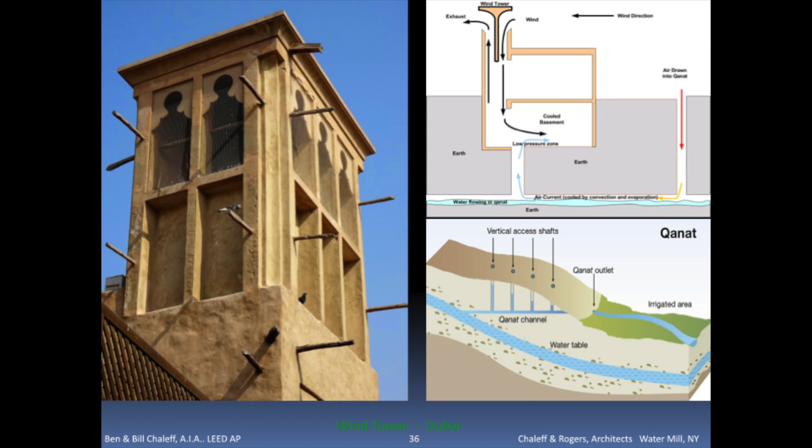This is a brilliant use of knowing what your resources are and what you can do with them. You're driven to this because otherwise the climate would be pretty unbearable. It's the first geothermal system, right? And that's what it looks like as part of a whole building.

Because at about the same time across the Mediterranean, there's the stone building, the same arrangement of columns and lintels and so forth. The Egyptians were also building these buildings out of stone. I think the precursor lies not in a wooden, quote, primitive prototype, but from what I understand about the relationship of Greece and Rome to Egypt, it lies in the work done by the Egyptians in creating their buildings, originally of stone, hardly any wood there. So I think that's what happened.

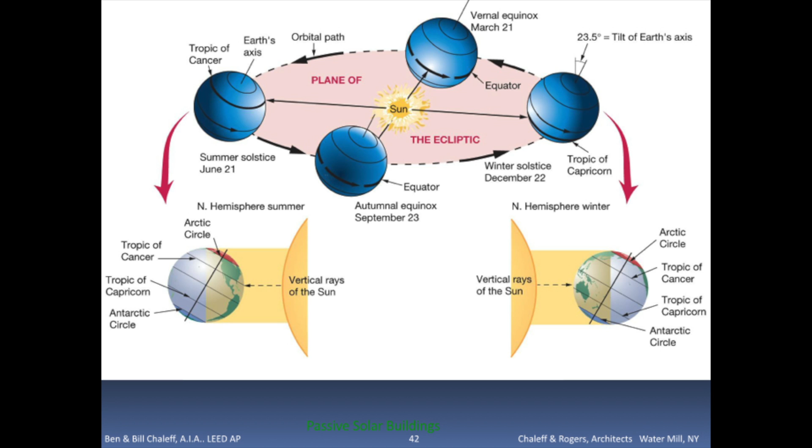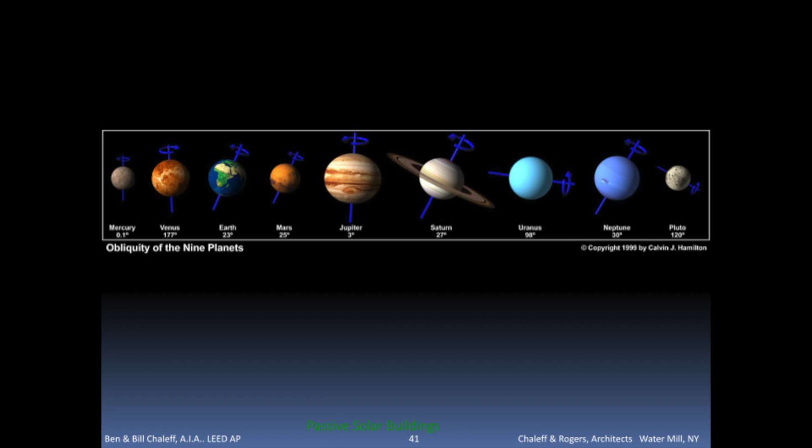Okay, so these are the pragmatic elements of the formula that shape our buildings, and that we should heed when looking for input about what our building will be like. If we don't pay attention to these basic issues, then we're not going to get an optimum building in terms of low energy use and in terms of being pleasant and comfortable to live in.

It's the whole concept that Socrates outlined: the southern side would always face south with a high wall to allow for more solar exposure, and the north side would slope. The roof would slope all the way down, so you'd have one story's worth of wall exposed to the north winds, and a lot more roof exposed to the north winds. This part was not new, but you'd have a large stone hearth at the center of the house. It would provide heat and cooking, usually on multiple floors, and once that mass got hot, it kept the whole house warm.

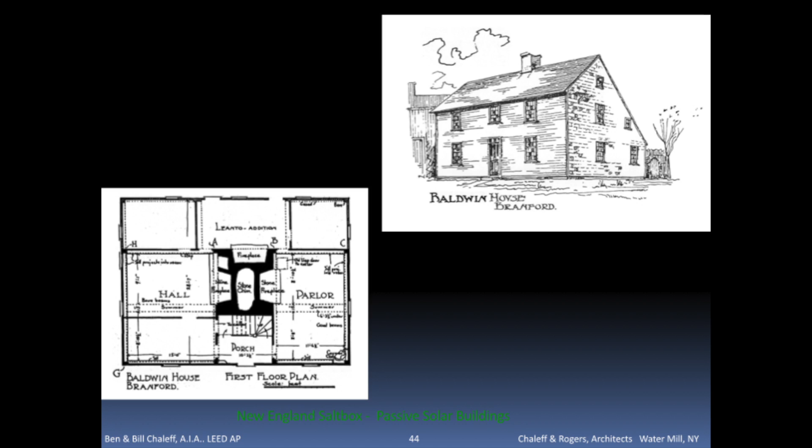So here we have a building form that responds 100% to climate, to resources, materials, and we get this optimum efficient building.

Thomas Jefferson, 3rd President of the United States, says, 'I'm tired of being a second-class act compared to France and England. What are we going to do about it? We're going to be the new Greece.' So he starts the Greek revival period and throws out the baby with the bathwater. These buildings face every which way, and Sag Harbor is a great collection of Greek revival buildings and buildings from other periods as well, but Greek revival.

The orientation is however the street is; it always faces the street. Whereas if you go to East Hampton, on the Mulford Farm and the Home Sweet Home there, those salt boxes, you can see the irregular roof line, the asymmetrical roof line. You're looking at the gable end of the building facing the main street because the building itself has its two-story wall facing south. So all of that went away.

Chimneys went on the ends of the building instead of in the center. Masonry is a horrendous insulator. In fact, it's the opposite—it's a conductor. So you don't want that on an outside wall, but nonetheless, this is what happens.

Now, if you go down Baltimore or further south, and if you take this portico off here, you will have a rectangular building with chimneys on the end. That's the prototype for buildings in that climate and further south when you're trying to cool, and the buildings are usually one room deep for maximum ventilation. But here, no, it's all about culture. It's all about what is up here, and it takes precedence over all the other pragmatic issues.

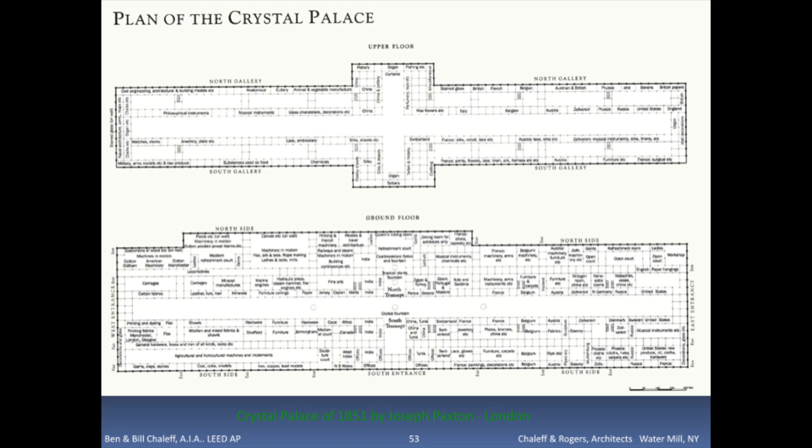This is the floor plan, it's 1,851 feet long - we understand why, right? And it's a simple section, because the design was the first mass-produced building. All of these cast iron elements are repetitive elements, so there are molds and jigs that can be used to create the whole building.

In fact, he even foresaw and understood the necessity to jig the actual erection and assembly of the building. He designed simple machines that fit exactly onto the building. The design of the building and its process of building it were designed at the same time.

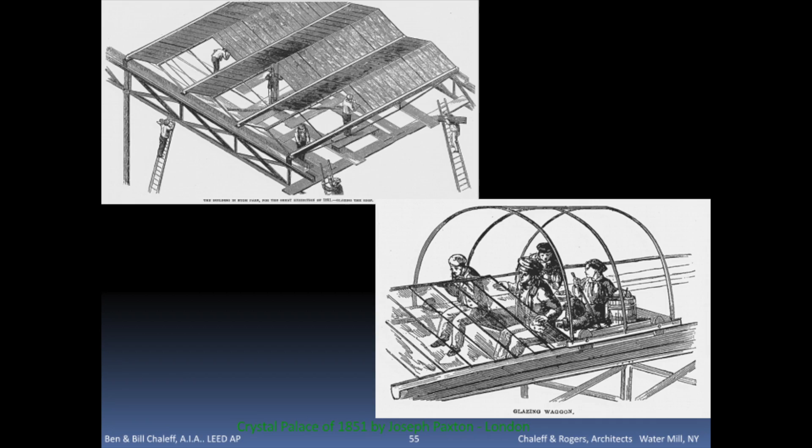So the acres of glass that were used, all in repetitive, same-size pieces, were stacked onto rolling carts, and they would run along in the gutter valleys. The workman would lay a piece down, seal it in, move on, do the next one. He designed and built the building in 6 months, and made the deadline on time and budget.

And the building was an enormous success. It was up for many years, and at the end of the fair, it got disassembled and reassembled on another location, and stood for decades. I think at one point there was a fire that destroyed the building ultimately.

But in terms of conceiving a building where the industrial world was now moving to the idea of interchangeable, exactly the same parts - that's what we have from Eli Whitney and the assembly of guns for the Civil War. That idea was born there and carried now into the world of building design. So we have the industrial building age.

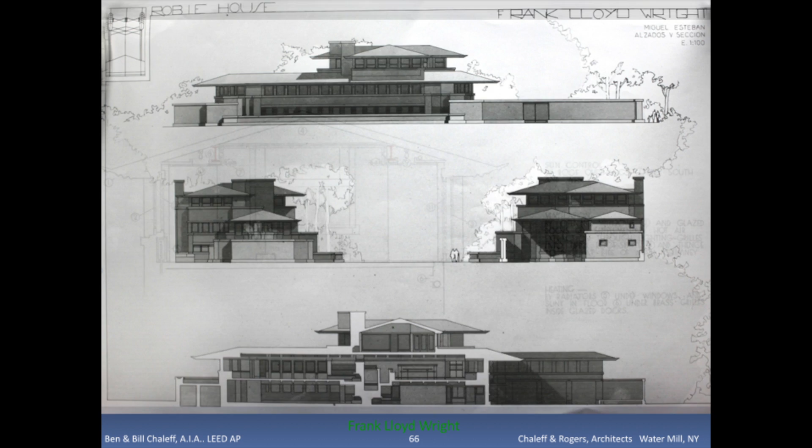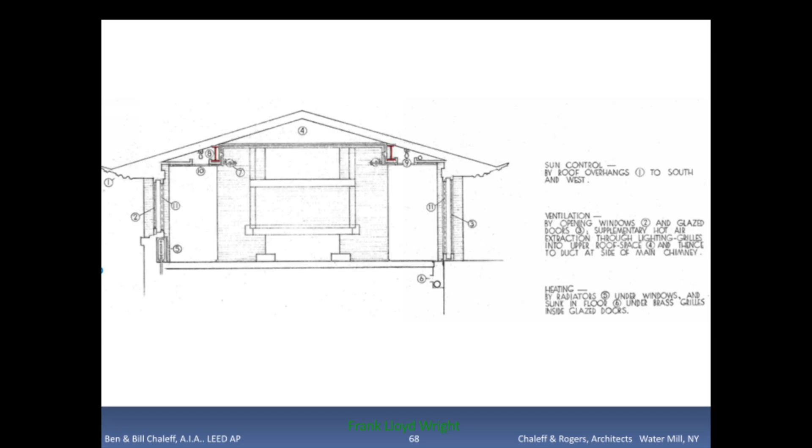If you go to the next slide, see that—you come through here, you're coming right in here. So you enter into this courtyard, facing south. As one—I forget the actual plan, the plan's on the next page, I think it shows that. No, I guess it's not. But the point is that through the day, as the sun rises in the morning and gets to be noon and passes into the afternoon, the sun's rays will start on the left side, assuming it's facing south. So basically the house itself, and the occupants, are tracing the path of the sun throughout the day.

He called that the solar hemicycle, in that you are always facing due south wherever you might be in the house, assuming you have the opportunity to face south throughout the day in the entire plan. The building is one room deep. The whole lower floor is one giant curved living, dining, kitchen, and then there's a second floor balcony with bedrooms to the north, but they enjoy the same view as the two-story glass wall.

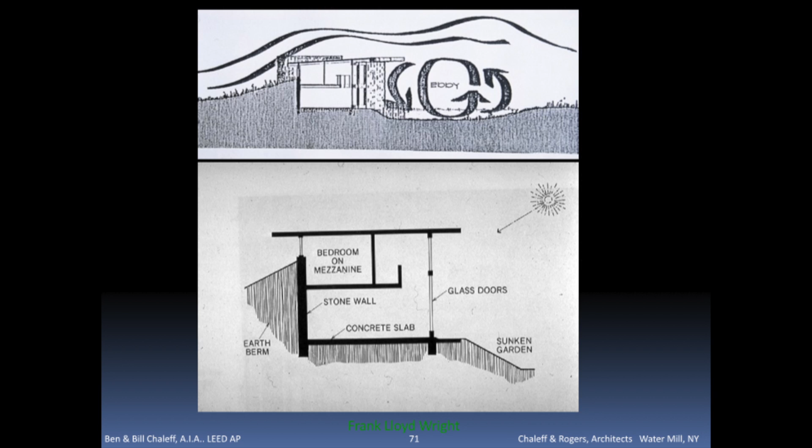That's the interior shot. Now if you go back to the Robie House and walk a few blocks from it, you will find the maximum expression of large sheets of commercially available glass at a relatively good, fair price, and big pieces of steel. That's different than cast iron in its ability to span and take bending stresses. Cast iron is brittle and doesn't bend very well at all, so you have to watch out when you use it as a beam. As a column, you can do okay.

This is Crown Hall on the Illinois Institute of Technology campus by Mies van der Rohe, and there's another view of it from the outside. The building essentially has these big bents, giant trusses at these intervals—I don't know how long that is, maybe 80 feet or something on center. The roof members are hung from them and span between.

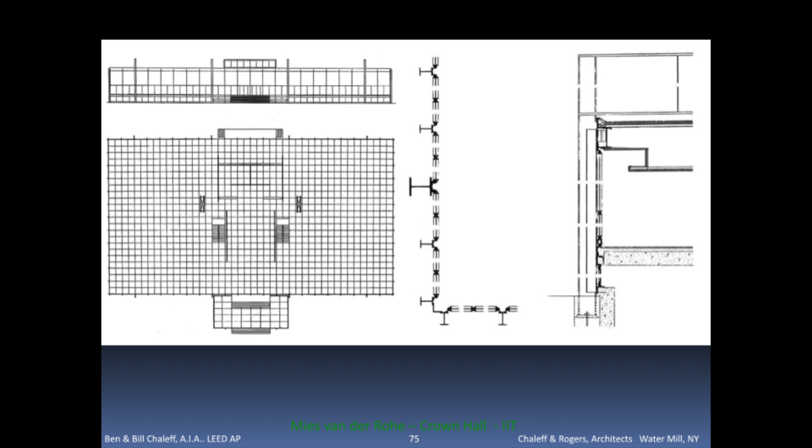So this is the plan and the building, and here's a detailed section. This is the big truss over the top, and the roof members are hung from that. These are the columns—he's expressing the columns and the glazing in between, right? Taking wind loads. And there we are for discussion.

Okay, well, did anyone save a question, or can they come up with one now? So not that long ago, buildings were typically built from all local materials. Here on the East End today, are there local materials that would make sense to build with?

There are some, I don't know how available they are anymore—they're becoming less and less usable, but one that is used quite a bit is the sand that we have. The quartz sand we have is actually perfect in concrete, and so in lots of parts of the country, concrete is cost prohibitive and not the go-to for foundations, for example. There's many parts of the country that use wood framing foundations, but because of our sand, the cost of concrete in our region on Long Island is relatively low compared to the rest of the country. So it enables that. Any other materials?

Well, historically, Long Island was clear-cut four times. It was the home of beautiful big white pine. King George III marked those as belonging to the king because he was building ships and building empires, and he needed that wood. So it served for that purpose.